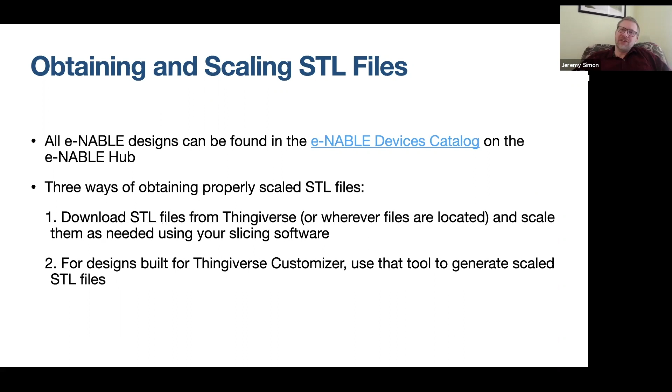So sometimes, unfortunately, the Thingiverse customizer isn't working - it happens to be down a lot. If you click that button in Thingiverse that says 'open in customizer' and it doesn't work, what you can do is download that SCAD file. You have to download a copy, it's free, of OpenSCAD. There is a video tutorial for how to do this, and I have the link here, which will be shared with this recording. So you can download OpenSCAD, load in that SCAD file, put in your parameters and measurements, and it will generate the STL files for you in the scale that you need. Then all you have to do is bring them into your slicer and print - you don't have to scale at that point.

So those are the three different methods of getting your STL files for printing. You can just download them straight from Thingiverse and scale them in your slicer. You can use the Thingiverse customizer to generate scaled STL files by putting in your measurements, or you can download and use OpenSCAD to do the same thing. Now, once you have your STL files, like I said, the most common method is you're just going to download them from Thingiverse and scale them in your slicer. So let me show you what that looks like real quick.

If we go over to Cura, I'm using Ultimaker Cura. This is, as far as I'm aware, the world's most popular slicing software, but there are many others. So today, this is what I'll be showing you.

If you're using a different slicing platform, there's a very good chance that whatever I'm showing you, there's some equivalent in that slicing program because they're all very similar. So hopefully you'll have the same tools available to you. I just happen to be using Cura.

So if we just bring in a file here, I'll just grab an STL file, and this happens to be one of the old Gauntlet options, or what we used to call Gauntlet. We're calling it a cuff these days, for the Cyborg Beast design. And if you need to scale this part, all you have to do is select the part, and then over here on the left side, you have tools, and this one right here is the scaling tool.

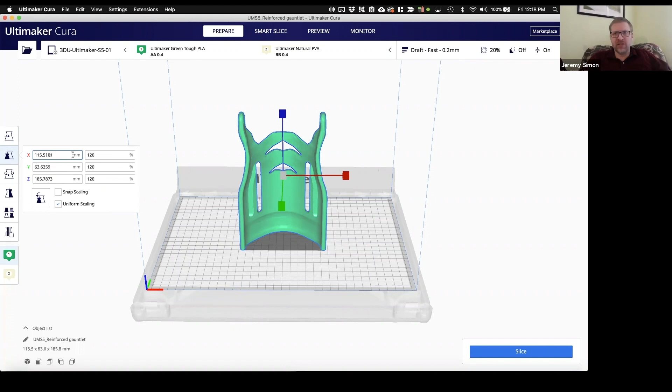And by default, this box would be checked. It says uniform scaling. Most of the time, that's what we do. We just want to scale the whole thing to, let's say, 120%. So if I put in 120%, boom, the whole thing is scaled to 120%. It's that easy. Every once in a while, you'll have to do non-uniform scaling.

Maybe you need to have a device that's extra long. So the Z factor might be a different percentage than everything else, and you could sort of stretch it out that way. So you can do non-uniform scaling just as easily. If you figured out what the right scaling measurements are, that's a different tutorial. I actually just created a new one the other day, so you'll have that soon in the hub.

But the scaling process is as easy as that. You bring in your model and you select your scaling tool and you put in a percentage, which you've already figured out through our virtual fitting process covered elsewhere. And the scaling is done for you. So it's that easy. Let me switch back to the presentation.

All right, so let's talk a little bit about hardware. Now, first, somebody asked me actually just earlier today about the differences between the different types of 3D printers. So we better cover this real quick first, because everything we're going to be talking about today is really related to what we call FDM 3D printing, which stands for fused deposition modeling. It's essentially extruding melted thermoplastics in layers, building up from a build plate layer by layer.

And this is the one that most of you are familiar with. These printers are very affordable. It's very accessible. There are all kinds of different printers available in different price points, and it offers the widest choice of materials. And we're going to be talking about that more later today.

There's another one called SLS. This stands for selective laser sintering. And this is where you use a laser to sinter layer by layer a powdered media. Usually it's nylon, but it could be other materials. So it's a fine powder, and you basically have this sort of a tank full of this powdered media, and you're using the laser to sinter one layer, and then it sort of brushes a new layer of this powdered media over, and it sinters the next layer, and it goes layer by layer.

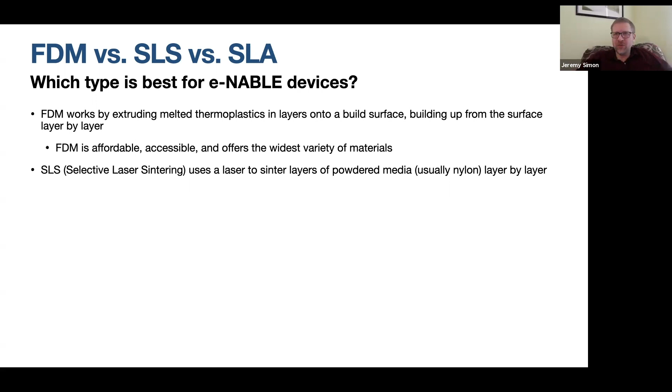But the result is that as your object is being built in this powdered media, it's being fully supported in that powdered media. So you don't need what you would normally consider supports. Your object is fully supported as it's printed. So you can print all kinds of amazing things. But SLS prints tend to have a very rough surface.

And I'll show you this. I've got some photos I'll share with you in a moment that show you these different types of printing and what they look like. But SLS prints tend to have a very rough surface finish, not very good for moving parts when you have to have things that move smoothly with one another like we do. Also, SLS printers tend to be very expensive. As far as I'm aware, the least expensive one is somewhere north of $10,000 as far as what I've seen.

So they're pretty pricey. Then we have SLA, that stands for stereolithography, which uses a light source, could be LCD, it could be DLP, et cetera. Some use lasers to harden a photosensitive liquid resin layer by layer. So in this case, you have sort of a pool of resin, and your print sort of lifts out of it as it cures layer by layer. And I'll show you that in the photos.

But these printers are becoming a lot more affordable and a lot more accessible. So a lot of people are asking about this. Now, the first thing to know about SLA prints is that they're extraordinarily high quality, and I'll show you that in a moment, but they have relatively few materials available.

You only have certain resins to choose from, and most of those resins tend to be, number one, not really well suited for Enable devices. They tend to be sort of brittle. Now, there are tough resins. There are resins that have the kind of physical properties we want, but then you run into the problem of them becoming rather expensive. Some third-party resins are coming into the market, so this might change. We might have affordable options for SLA with resins that would work well for Enable. Right now, it's not something I'd really recommend for Enable devices unless you can afford those really high-end engineering resins.

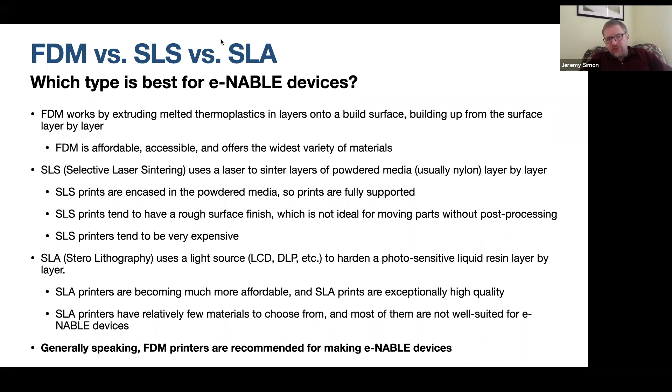Generally speaking, FDM is what we recommend. FDM is what most of you are using. And so with that, we are going to move on and focus on FDM printing. But before I do that, I'll just show you a few of these photos, like I said. So I've got a couple of examples here. If we look at kind of just general 3D printing, this is the one all of you know. An FDM printer is doing just what you see here. It's putting down melted plastic layer by layer, building up from the build plate, building up vertically. Most of you already know this.

So the SLS, now let's see, I think I had one of these. No, I might not have put this into my right album here. So I don't have an SLS print to show you right now, but SLA prints, this is what it looks like when it's printing. It's coming up out of this vat of liquid, and you can see this sort of scaffolding of support that you may or may not need, very much like when you're FDM printing. And those just break off very easily. They're connected just with a tiny point on the object.

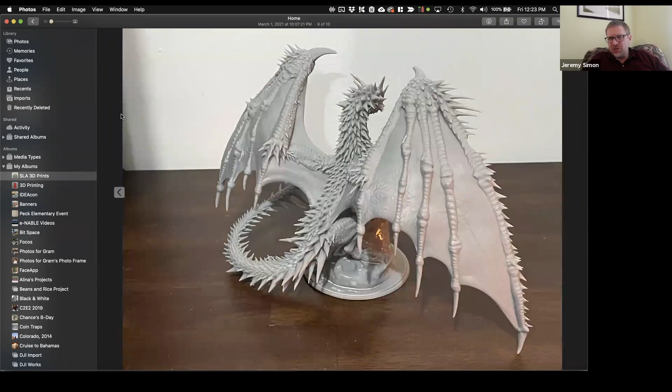And after you break those supports off, you're left with an object of incredibly high quality, which, if we zoom in here, you could not get out of an FDM printer. So when you need the ultimate level of quality and detail, that's where SLA shines. I would not say that it's the first choice for e-NABLE devices though.

So determining which materials you can use. You have your printer now. Let's assume you have an FDM printer. Now you're wondering, what materials should I make my e-NABLE devices out of? Well, the first question is, do you have a heated bed? Because if you don't have a heated bed on your printer, then you don't have a whole lot of choice. You're pretty much limited to PLA, some of the enhanced forms of PLA, maybe TPU for flexible printing if you have a certain type of extruder, but you're pretty limited. Mostly those printers are designed for PLA. And as we're going to discuss shortly, PLA is not really the ideal material for e-NABLE devices. I'll explain why. So let's hope you have a heated bed.

If you haven't bought your printer yet, I highly recommend one that has a heated bed. I also recommend that you avoid the mini type 3D printers. Some people like to start off with an entry level sort of mini printer, real nice small form factor that can sit on a desk. The problem is that the bed is so small that you're gonna have a hard time making some of the Enable devices. Best case, you're gonna have to do a whole lot of print jobs just to get one device made because you're gonna have to print the parts one or two at a time. Worst case is some individual parts might not even fit for some of our designs, and you might have to figure out how to split those parts into multiple pieces, and it just makes things a lot more difficult.

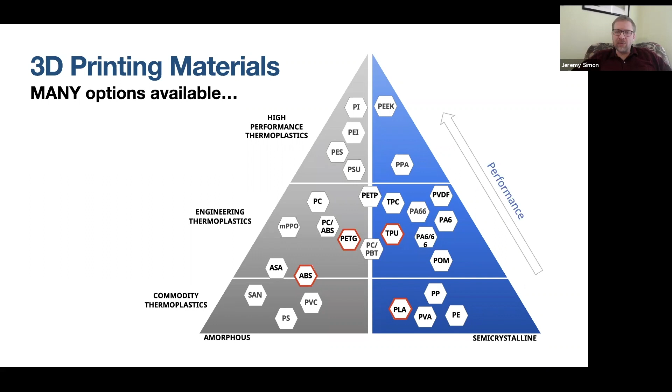I think I have a slide on it, but mostly we're going to focus on these materials because this is what most people deal with in Enable. So let's start with PLA. Most of you already have heard of PLA, maybe have used it. It is wildly popular in 3D printing, and there's good reasons for that. It's very easy to print.

It does not tend to warp, no matter your environment. You can have an open build chamber. You can have all kinds of drafts going on. It's just happy to print just as nicely as if you have a warmer environment without any drafts. So it's really a nice material to work with. It's widely available, probably for that reason. It's very inexpensive, again, because so many sources are available for it.

It's environmentally friendly. It's made almost entirely from plant-based materials and therefore non-toxic. You do not need a heated bed. So pretty much any 3D printer on the planet can print PLA. So it's really a wonderful material for a lot of reasons. The cons would be, though, that it is a fairly brittle material. So it's hard, it's nice, it does have strength, but it's brittle. It will break under stress. It doesn't have a lot of give to it.

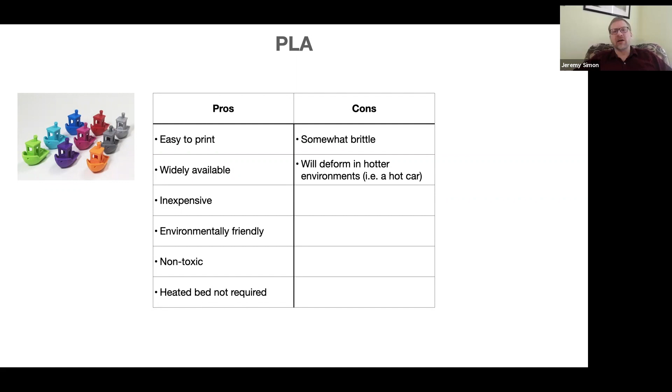And it is going to deform in hotter temperatures. It does not have a very high temperature resistance. So for example, if you were to leave an Enable hand in a hot car on a summer day, you will come back to find that hand in a very different shape than when you left it there. It will be somewhat melted. So PLA, for that reason, is not a great choice. Even though it is so popular, it is not the material we're recommending these days for Enable devices, unless you know that it's not going to be in that kind of a warmer environment.

There are a lot of enhanced PLAs now. There's Tough PLA and PLA Plus and PLA High Impact and all kinds of different enhanced PLAs, and those are really nice. They're just as easy to print as normal PLA. They're widely available also. They're growing in popularity. They're also inexpensive, often the same price as normal PLA, but environmentally friendly, non-toxic, pretty much the same benefits. The only difference is that they're 2 to 3 times as strong.

So you kind of got to ask yourself, well, why would I use normal PLA? Honestly, speaking for myself personally, I don't. I almost never use PLA these days because Tough PLA is my go-to material. There's just no reason to go to PLA except that it's available in more colors. People tend to offer these enhanced PLAs in a smaller range of colors. So that's the only reason I would go to PLA, is if I need something in a particular color. Otherwise, I use Tough PLA.

I'm not talking for Enable devices now. I'm talking just for my general printing needs. I still wouldn't recommend these for Enable devices necessarily because of the temperature issue. Tough PLA and these other enhanced PLAs are generally no better than standard PLA when it comes to temperature resistance. So still not an ideal choice.

ABS. Now this was really popular back when desktop 3D printing got started. A lot of printers were kind of optimized for this. FlashForge printers, for example, when you buy one, it would come with Kapton tape on the build plate, which is designed for ABS to stick well to it. And there are some nice things about this material. If you've ever played with Legos, that's the material we're talking about. It's a petroleum-based plastic that has that typical plastic feel to it.

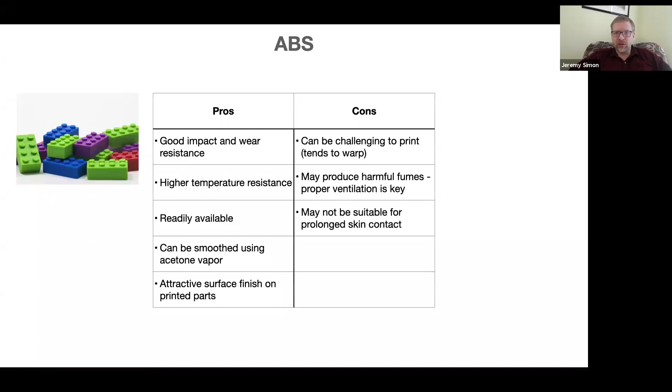TPU. Now here's an interesting material. This is a flexible material, and it's a lot of fun. It has really good impact and wear resistance, so it's great for things that might be involved in a lot of movement or friction or vibration dampening. Some of our e-NABLE designs have incorporated this in the hinges, and it makes for much quieter hinges than some of our other designs.

But it can be a very challenging material to work with, and that goes back to what we were talking about regarding a direct drive extruder, which can be very helpful for printing these flexible materials. Not necessarily required, but very helpful. So something to think about as you're looking at a 3D printer, or maybe your next 3D printer.

And then there's PETG, and ultimately this is the recommended material for e-NABLE devices as of now, at least in my mind. Some might disagree, but this is the material that I have been recommending and a number of others have been recommending because it has a lot of good qualities. It's a lot stronger than PLA, much stronger. It's also environmentally friendly, more so than ABS. It's non-toxic. It's used, for example, in a lot of water bottles and those kinds of products that we're familiar with. It has a much higher temperature resistance than PLA, so it takes care of that issue for us.

But it's not so high that you'd have trouble thermoforming it. It would be very difficult to thermoform an ABS part. It definitely is possible to thermoform a PETG part. You have to use a little bit more heat, a little more time than a PLA part. So if you were using, for example, the hot water method, which is covered elsewhere, you might have to submerge a PLA part for 5 seconds and it starts to deform. A PETG part might take 30 seconds, but it still works quite nicely because you get the benefits of the strength and that temperature resistance later on.

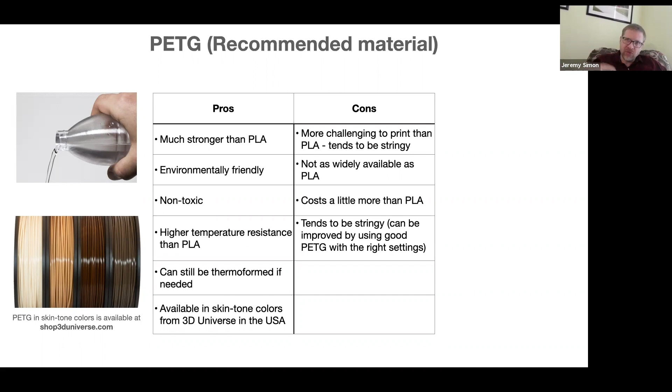So that's the recommended material overall for a device that's going to a recipient. Not necessarily if you're doing your first test device or something like that, but if this is something that you hope somebody is going to end up using, PETG is recommended.

All right, now we've got our 3D printer, we've picked our material, we've got our STL files, and we've gone through our scaling process, and we've figured out how we need to scale them. Now we need to get ready to print them. And the first thing you want to think about in printing is part orientation. Most of us think about part orientation as primarily affecting print time, like how can I get this printed most quickly, or how can I use the least amount of space on my build plate.

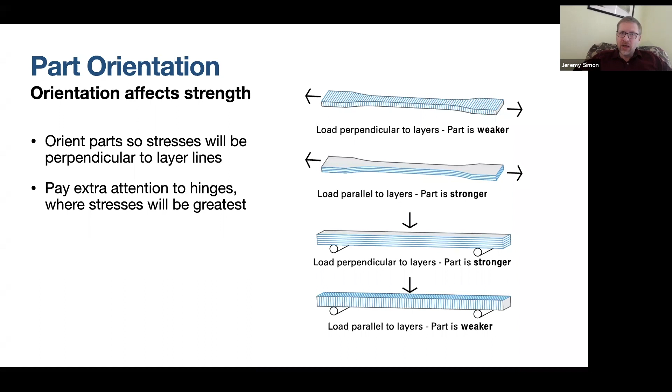But that's not really what you want to be thinking about. What you want to be thinking about is the orientation of the layer lines and how that relates to the stresses that are going to be placed on that part and what's going to yield the best strength overall. So this is worth taking a look at. Let's pause for a demo here.

If I go back into Cura and we reset our scaling here, and we look at this. So I just grabbed this. This is an old version of a cuff that is probably not used very much anymore. It goes with the Cyborg Beast design, but it's helpful to illustrate a concept. I don't know if you noticed, when I first dragged this file in, it came in this orientation, which suggests that that's the way the designer wanted you to print it, right? So you'd think, okay, they want me to print this vertically.

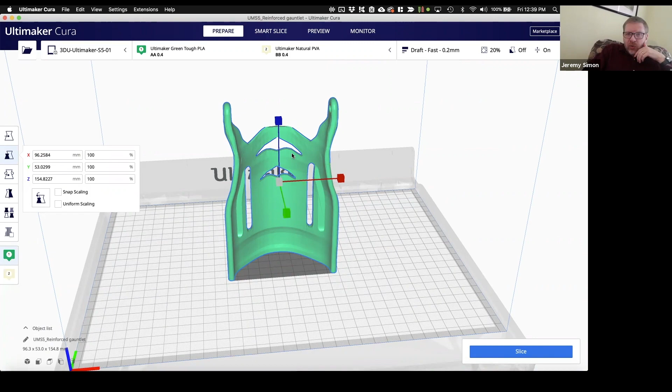And at first glance, that looks nice. It looks like a good way to print it because it looks like you have a flat bottom here to connect with the bed, which is something that we know we want when we're 3D printing for good bed adhesion. And even when you look at some of the spaces in here, how these are angled upwards, that suggests it's meant to be printed this way because you can print as you're stepping up layer by layer. Printers can do that without supports. So that all suggests that it would be done this way.

Well, let's do an experiment here. I'm going to go ahead and slice this just using draft settings, so it'll be quick. Slicing is basically taking your model with your designated settings and dividing it into layers and instructions for the printer on how to print each layer and where to move on each layer. So it's slicing that right now. And as soon as the slicing is done, we get a chance to preview it, and that's what I want to show you here.

So let's just take one more moment. There we go. All right, so now we'll go into preview mode, and it's got to render real quick. Okay, so here we go. Now we've got our model, and at first glance things are looking okay. But here's what I want to show you. Let me reposition this a little bit.

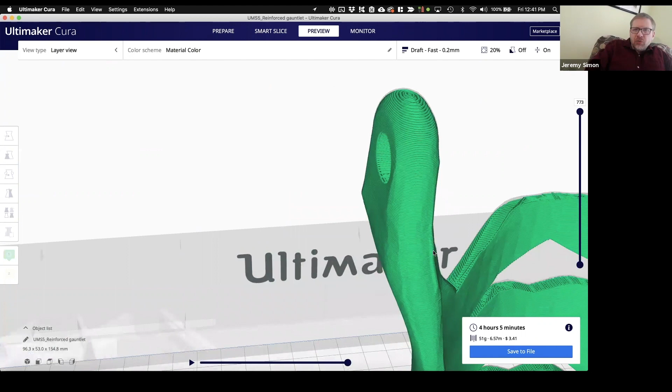So let's look at these hinges here. When you really start to zoom in, you can see the individual layers, and over here you've got a tool on the right to scroll through these layers, and you can see what's going to be printed on each one, including your outlines and your infill and everything. And if we get up here into this hinge, look what's happening.

If you look right there, that's where this device is going to break, because you've got so much stress on this hinge and you've only got these two little spots of material trying to connect layer to layer. Your parts are always going to tend to break along the direction of the layers. The layers are just going to tend to split along the line that they were printed. They're not going to tend to break perpendicular to those layers. So even though it would look like you would want to print this part vertically, that's not true.

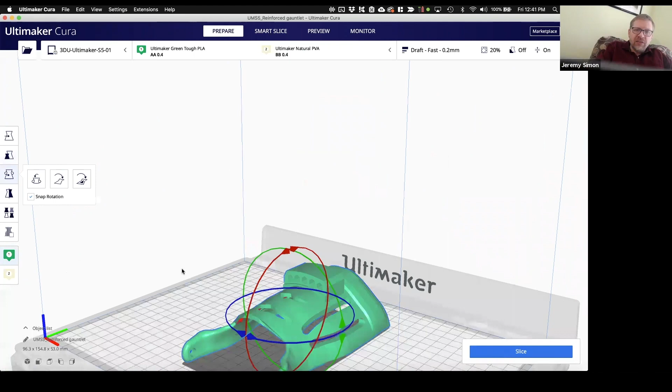Let's go back to our prepare mode. What we would want to do is go to our rotate tool over here and flip this part. You can use these little arrows here to flip it 90 degrees. There we go. And we would want to print it in this orientation, okay? Now, that opens up some other issues that we're going to cover later. So for right now, all I wanted to show you is the orientation thing, and we'll come back to this a little later.

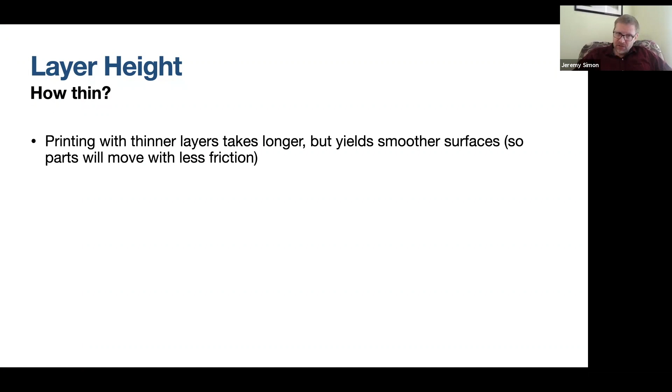Printing with thinner layers takes longer, but it yields smoother surfaces. So when you have moving parts, you'll have less friction, which is good for enabled devices. For the most part, we recommend somewhere between 0.1 and 0.2 millimeter layer heights for enabled devices. It's not set in stone, but that's what we generally recommend.

I usually use 0.15 millimeters myself. Sometimes I'll use 0.1. I usually don't go to 0.2, but a lot of people do, and it's okay. Thinner layers are nice because it makes parts move more smoothly and more quietly. I personally don't care about print time so much. I'll set up the print job and let it run overnight, so I'm happy to let it go at a slower pace and get a nicer print quality out of it.

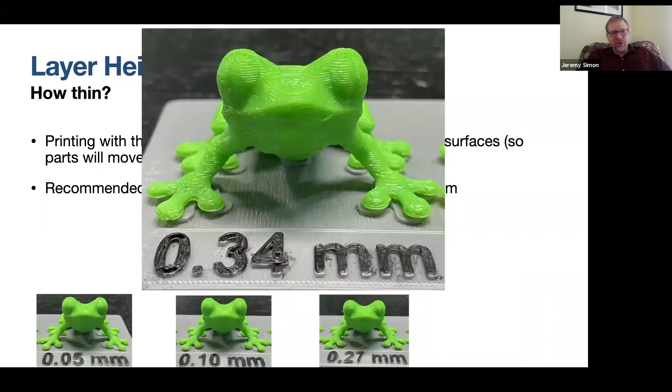I'm going to move on. Shells and wall thickness: you want at least 3 shells. I usually say 3 or 4 shells for enabled devices.

Or sometimes it just asks for your wall thickness, and that's going to depend on your nozzle diameter. So if you're using a 0.4 millimeter nozzle, which is typical, and that's what the 3 or 4 shell recommendation is based upon, that means we're looking for a 1.2 to 1.6 millimeter wall thickness, generally speaking.

Too much more than that, and your device is going to be heavier than it needs to be without enough added strength benefits. It tends to break at the joints or things like that anyway, so you're not really getting a lot of benefit, you're just adding weight. So you don't want to go too much higher or too much lower than 30, or you start to get a weaker part overall that might have breakage.

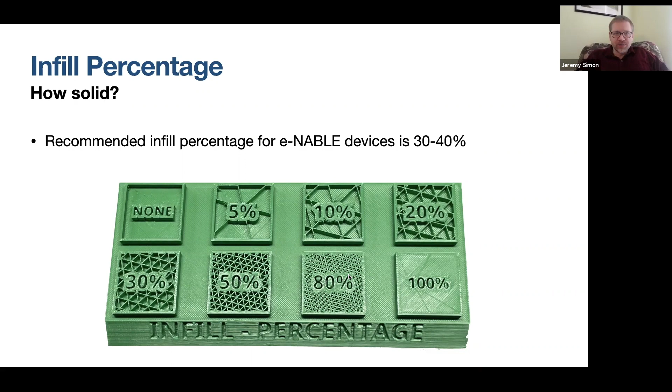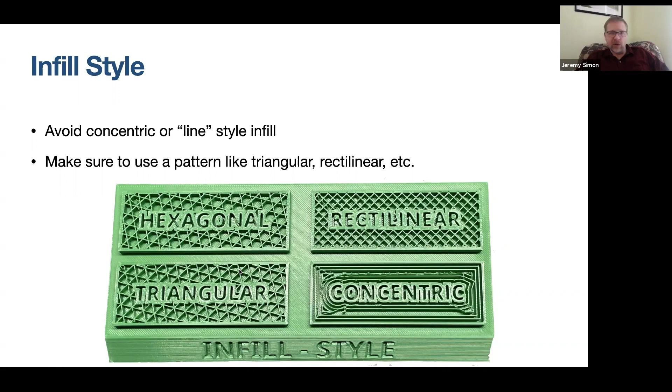Infill style is also an option. A lot of slicers just take care of this for you. The default is usually something like rectilinear or triangular, and anything like that is fine. Hexagonal is fine too. Any of these patterns where you see that crossing grid pattern is fine—you get a nice strong infill. You want to avoid things like concentric, which you see in the lower right. It just doesn't give you the same kind of strength and rigid structure on the inside.

Several of our e-NABLE designs, and I dare say most of them nowadays, are designed and optimized to print without supports, which is really nice. Most printers can handle overhangs up to 60 degrees or so without supports. I know that might be a new term—we're going to talk about overhangs in a moment. Bridging can also be used to help with this, and that might be another new term for you. So we're going to cover those two new terms next and how they relate to supports.

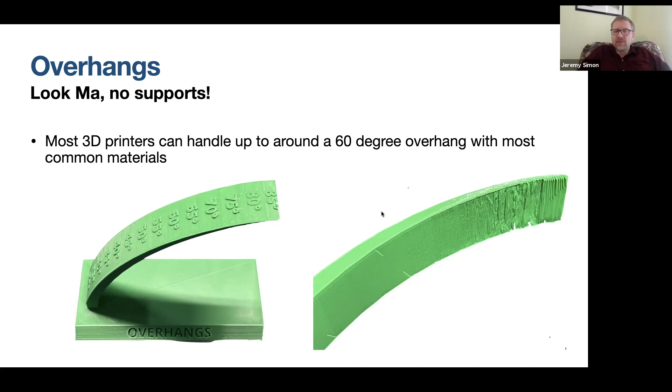All right, so then there's also something called build plate adhesion, and this is in most slicers. You can choose your build plate adhesion method. There's generally three types of build plate adhesion, or I guess you could say a fourth type is none. A raft is one option. It's one that I almost never use, and I would say avoid it if you can, just because it adds a lot of printing time.

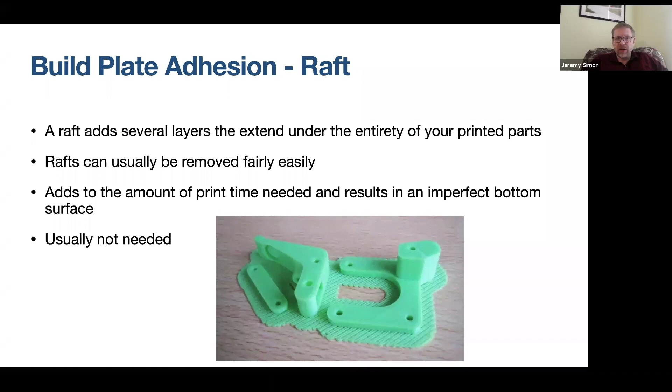You have to kind of go around with an X-Acto knife and trim the little bits that might not come off cleanly. So again, if I can avoid it, I don't use it.

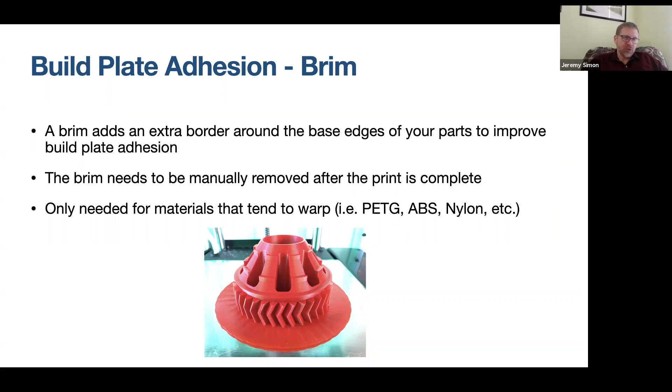It does help with materials that tend to warp, like PETG, ABS, nylon, etc. Again, with the right adhesive though, even with those more difficult materials, I usually don't use a brim, and I'll show you that shortly. And then you have what's called a skirt.

This is what I typically use. This is really simply there to clear out the extruder, make sure that if there were any remains of a previous material in there, or if maybe your material wasn't fully primed all the way up to the nozzle, if it settled back a little bit, the skirt just extrudes a couple of loops of material outside of your object so that you know your material is coming out clean and smooth, and then it proceeds to start printing your object.

So I really like using a skirt for that reason. It's not connected to the object, so you take your object off the build plate and the skirt comes right off, you just throw it away. It doesn't add any time, it hardly adds any material. So I usually have the skirt enabled as an option.

All right, so general recommended settings, we've covered this, but just in summary: layer height 0.1 to 0.2 millimeters for e-NABLE devices, shells or outer walls 3 or 4, or if you're doing something other than a 0.4 millimeter nozzle, you want somewhere around a 1.2 to 1.6 millimeter wall thickness.

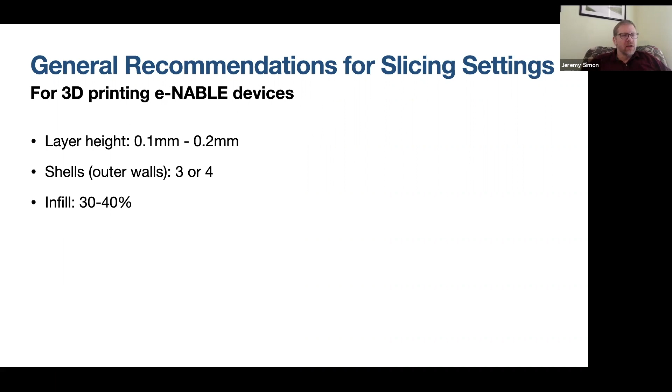You want about 30 to 40% infill. You want to address all the temperatures and speeds and retraction settings, etc., based on the material that you're using. We'll talk about some of that in a little while, but that should be provided with the material that you get. The material manufacturer will give you the settings or a profile that you can use, so you shouldn't have to mess around with that too much.

And then one last thing, and this is incredibly important: always, always, always preview your G-code before you print. I cannot stress this enough. Nothing will save you more headaches and more wasted time and wasted material and failed prints and frustration than previewing your G-code before you print. So absolutely get in this habit. And I'll show you why.

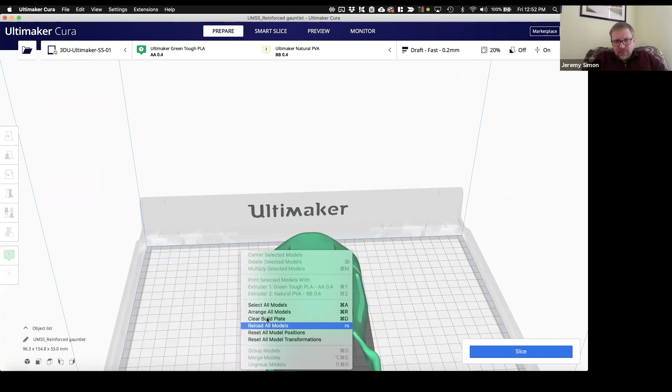Okay, let's get into another little demo here. I'm going to get rid of this part for a moment, and let me grab a different part. This is one that I've been working with Jon Schull on in a different group, where we've been doing some design work on masks. This one is for a vacuum formable mask that we're working on, and this is a mold that we're printing. So he sent this model to me.

You drop it on the build plate and it looks good. So I would go ahead and set up my settings and get the layer stuff that we just went through - let's just pretend I already did that. I'm going to go ahead and slice this. We've got it on draft settings here for this demo, so it should go fairly quickly.

But again, I want to show you why it's so important to preview, because it can be very deceiving. Even if you kind of pan around, everything here is looking pretty good. I mean, we've got a nice flat surface. Yeah, I mean, everything looks like this should be no problem.

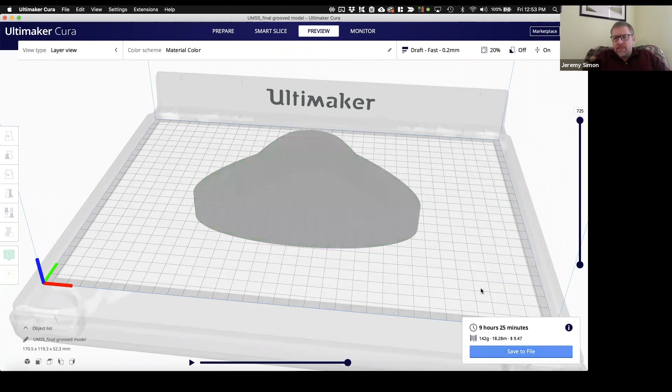Now the slicing is done. Let's take a look at the preview. And again, once the preview renders here, the very first thing you want to do is scroll all the way down to the first layer. This is the reason we're using the preview. And if I go down to layer 1, look at what becomes immediately apparent.

Oh, that first layer doesn't make full contact with the bed. So that bottom surface wasn't actually flat, even though it looked like it. It maybe had a little bit of a bulge to it that I couldn't see.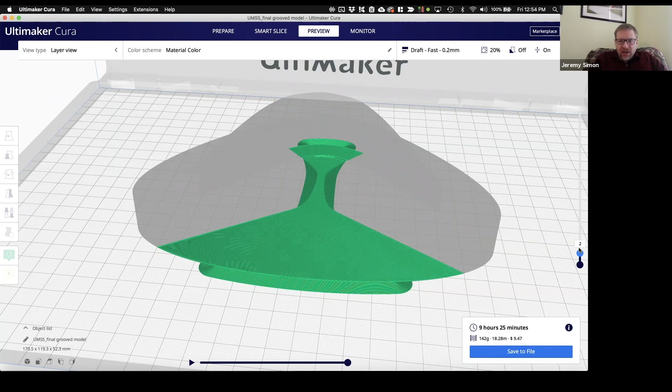And if I was to try to print this, it would print that layer, and then it would go up to layer 2, there you go. So you see it's trying to print outwards further, and then layer 3, it goes a lot further, and only when it gets to layer 4 is it printing the full surface. Well, I'm using 0.2 millimeter layer heights here, so that means that I'm already at 0.8 millimeters off the bed, and it's trying to print. That stuff is not going to stick, and so this is going to be a failed print. And I can see that just by looking at the first layer.

How do I fix this? Well, it's easy. I could go back to the CAD tool and fix my model. That would be the ideal way, but there's a quick fix. Just go here to your Move tool, and on the Z-axis, vertically, I'm just going to drop it down. I'll take it down 1 millimeter. What that's going to do is move it just slightly below the build plate, essentially cutting off the bottom part of your object, and you will end up with a perfectly flat surface. And so after you slice it and go into the preview and go down to layer 1 again, you'll see it's going to show the full layer 1.

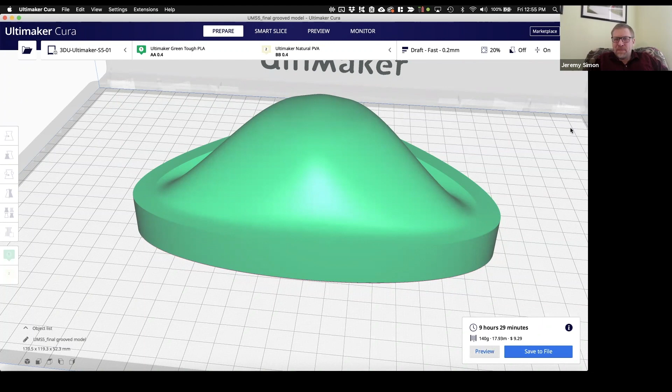So here we go. Now if I scroll down, it's still rendering, there we go. Scroll down to layer 1 and look at that. We got a beautiful layer 1 covering the entire object. That open slot in the middle is intentional, that's part of the object. And you can see our brim around the outside. This is going to be a successful print. And I can then scroll up and look at everything else. My infill looks like it's enough, and I can look at the thickness, and everything looks like it's going to print well. Now I'm ready to print, okay?

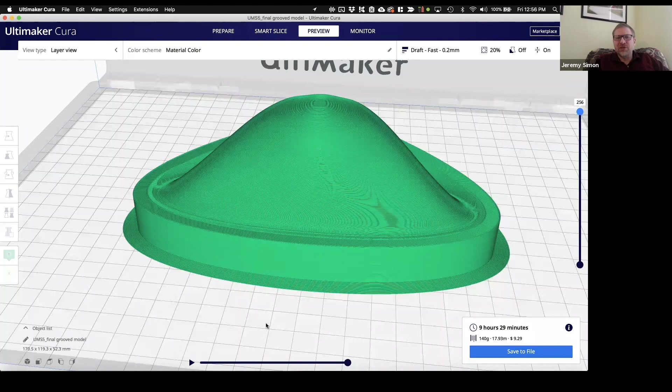So it's very, very important to preview your G-code to avoid lots of failed prints and headaches, especially when you get into some of our earlier designs where maybe folks hadn't gotten so used to how you prepare parts for 3D printing and make sure they're oriented properly and have a flat bottom and all that. Some of those earlier designs have parts that you really just can't print without manipulating and adjusting them a little bit.

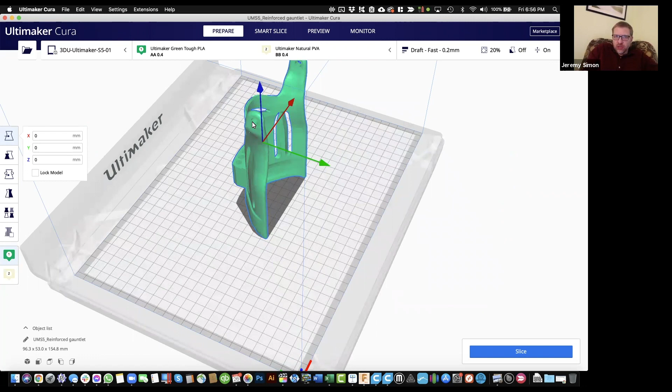All right, so now let's take another look at this cuff object that we were looking at before from a couple of different aspects. We already looked at why this is not a good orientation to print in, because we would have some strength issues because of the layer orientation, especially near the hinges. So let's go ahead and reorient. We'll just spin it around here. Let's rotate it like this, and then rotate it like this. Okay, and now it looks like that would be a flat surface. The first thing we're going to do is check to see if that's the case.

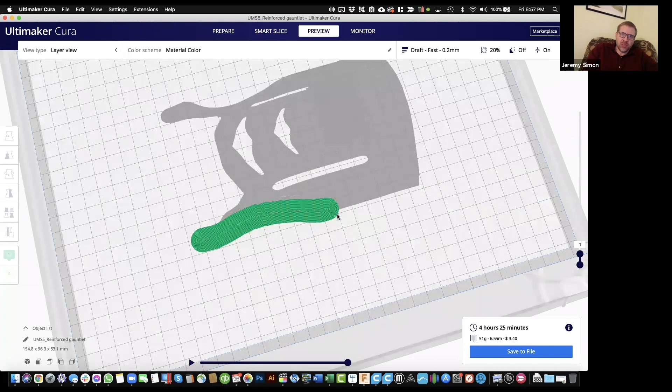We're going to go ahead and do a slice, and then go to preview. And we'll scroll down to our first layer, and we can immediately see that we are not making good contact with the bed. We're only making contact along this portion here. So that's something that we have to fix. So let's go back to prepare mode.

Now, if you select your model and use the rotation tool, they have a couple of tools here in Cura. You can reset the rotation, that'll set it back to what it was. But they also have a lay flat tool. So if I click that, let's see what it does. Doesn't look like it did a whole lot, but let's go ahead and slice and see if that improved the situation. Preview.

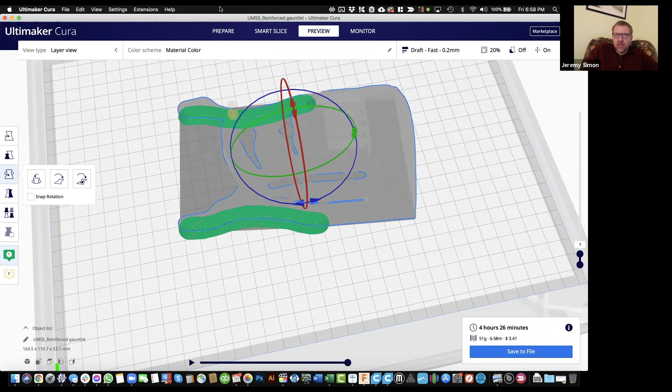Okay, well, it did improve it. It rotated it a bit so that this side is now making contact as well, but it's not making contact all the way to the rear part of the object. It's only the front. So let's see what else we can do. If we kind of just spin around and take a look at this, you start to see that what you're really dealing with is just a modeling issue. This just wasn't really designed with a flat surface to be printed in this orientation.

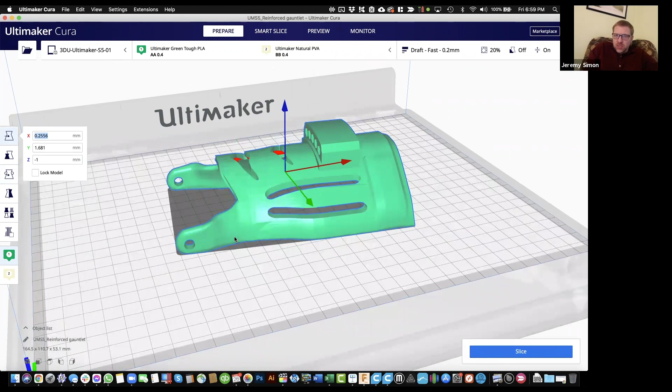And one way that we can fix that is just to select our object, use the Move tool over here, and move it negative on the Z-axis, let's say 1 millimeter. See what that looks like. Oops. And it just drops it down a little bit. So it is going to cut off, and that might be too much. Let's try negative 0.5.

And so what it's going to do is it's just going to ignore anything that's below the bed level, which is essentially just slicing off that part of the object. And it'll start printing where the bed starts. So if we slice that now, and go back down to layer 1, now we're talking. Now you can see that it's making contact all the way along both sides. And as you scroll up, it's building cleanly up from those spots.

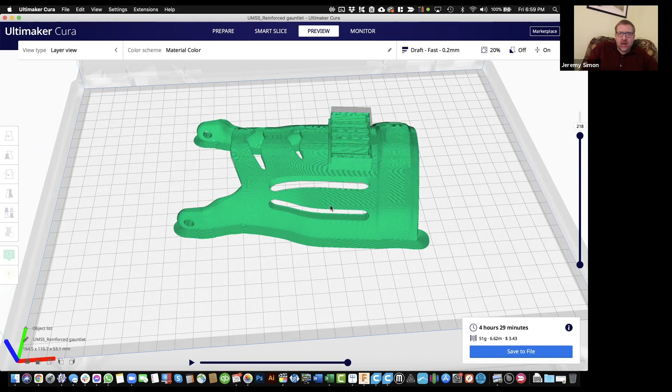Now, we still have to think about supports. Okay, well, you could get away with doing this without supports. The main issue is going to be these slots actually in here. And the reason for that, if you zoom in, you can see this with the layer preview. Now we can do bridging, so you might think, well, why can't bridging handle that? But if you scroll down to that point, let me get above it, as it starts to build out across that, see, it's not going all the way across.

And the reason for that is that the 2 points on each side are not at the exact same height. That upper surface has actually got a little bit of a curve to it. And so it has to sort of build its way across. And those parts right there are just not going to work. They're going to just fall down because you're printing in midair. So that's where you're going to have some messiness.

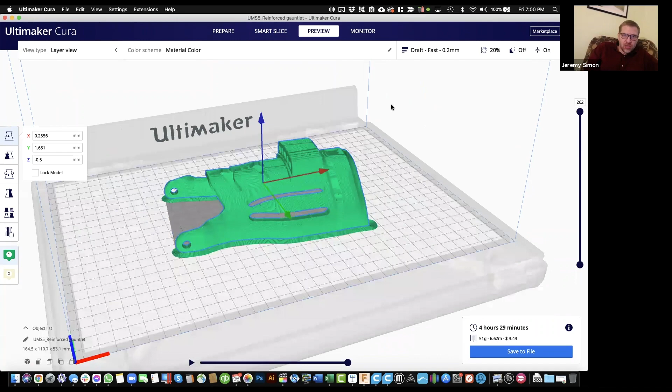And for that reason, if nothing else, even though you could print the rest of this, as far as this part on the inside, that could be done without supports because it's building up to that. And if you look up on the top portion, these areas where the tensioner pins go, those can also be printed without supports, because if you look at the shape real closely, you're stair stepping, you're building up gradually, and the printer can handle that. So there's no problem there.

But let's say that we did want to print this with supports to deal with that slot issue. So we'll go back to our prepare mode. And let's go into our slicing settings, and we'll just turn on supports. We'll just go with the default settings and see what happens. All right, so let's just say we're going to use our build material for the supports, nothing fancy. This is what you would do if you have a single extruder printer, which is common for most folks. You do not need dual extrusion for what we're doing here. Go ahead and slice this. And now let's preview.

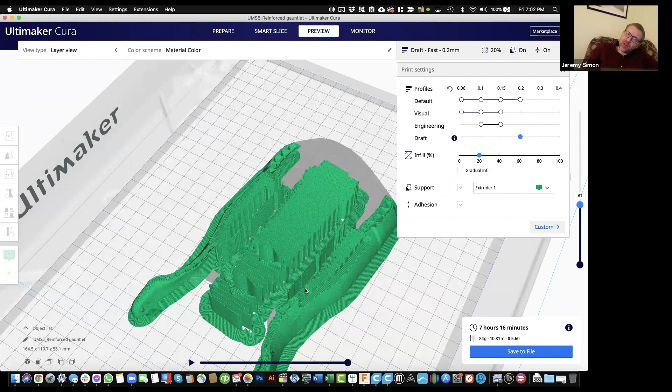All right, so now we can see that we have that support scaffolding going throughout the center area. And it's a little harder to see, but over here on the side, you can see that it also is building supports up to the part we were looking at. So that'll support the upper portion of that slot so that that prints cleanly. And if we keep scrolling up, we'll see that these supports go all the way up.

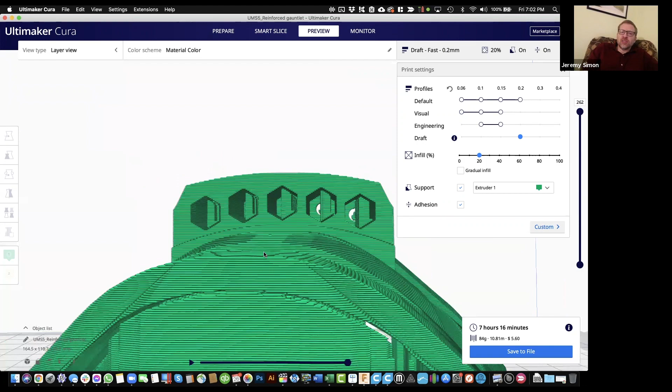Now let's look in here. Look what happened. It's actually putting supports inside these tensioner pinholes. Not the end of the world. We could certainly pull those out with a pair of needle-nose pliers or something, but on some designs, you have things like cable channels where you really don't want supports. Those channels can kind of wind their way through a palm and that sort of thing, and you do not want supports going in there.

So if you run into a scenario where you need to print with supports, but you don't want them going in certain areas like this, Cura offers a nice tool called a support blocker. Now, I don't know that all the slicers will have this particular tool, but in Cura, it's over here at the bottom of the left-hand toolbar. It looks like you see here with a symbol with a box next to it. And if you click that and then click somewhere on your object, it'll just drop a little square like this. Doesn't look like anything much.

Let's now deselect our object just by clicking off into the empty area here. And now we can select that cube object that was just put in here. See, it's just a small cube. That is an object which we can now move and resize and reposition however we need to. And wherever that object covers, it will block supports from being printed. So let's do that real quick.

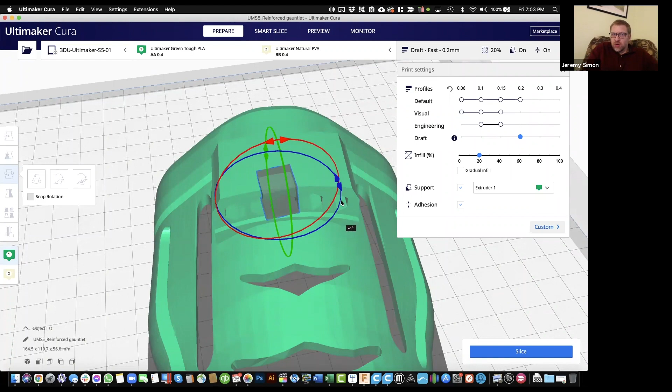We'll stretch it out. We'll move it over here a little bit. We'll rotate it a bit to align it. Whoops, that's the wrong handle. Undo. I see it's the blue one I want. Okay, so rotate it a bit. And now let's stretch it out. Let's do non-uniform scaling so we can stretch it this way and we can stretch it back that way.

And I don't really need it much taller, but we'll do a little bit like that. And now we'll move it because we want to make sure that it's not extending down into this area, because that will block the supports for that region underneath. Anything underneath that is going to get blocked. So we want to move it up until we can't see it underneath there, but so that it's still blocking those holes where we don't want supports. And there we have it.

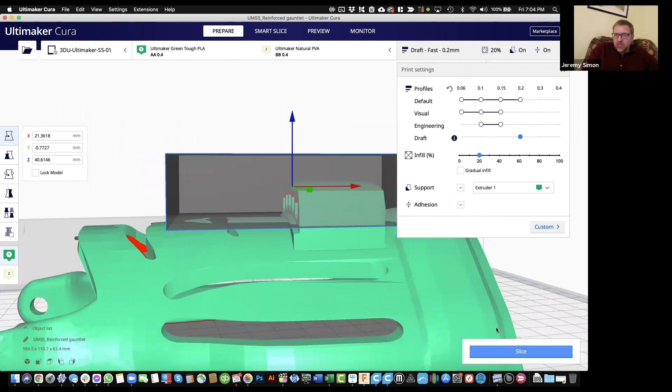So if I go ahead and slice now, let's see what happens. So now if we scroll through the layers, you'll see that we still have our supports there throughout the print. But when we scroll up to the top, no more supports inside these tensioner pinholes, which is exactly what we want. So that support blocker can be a really useful tool.

This is getting a little bit into advanced territory, but I'll also mention that these support blockers, once you add that object in, it can also be used in other ways. You can use that to change settings for specific regions of your print. So you could select that support blocker, and then this other tool, this icon here that has the 4 different types of shapes with different sorts of shading or patterns on them, click that. And now you can choose, with your support blocker object selected and only that object selected, what type of mesh that is.

Now, right now it's selected as don't support overlaps. In other words, support blocker. But you have three other options. Normal model, so you can just say that part's just normal, or you can say print as support, which means that anything overlapping with that will print as supports instead of as the object. So your object becomes sort of an indicator of where to put supports. You can get creative with that.

And here's the one that gets really interesting, modify settings for overlaps. So you can click on that. And now you can say either infill mesh only or cutting mesh. Infill mesh means that whatever settings you choose will only affect the inside of the object. Cutting mesh means it'll affect everything that your tool here, the blocking tool, is passing through, including the walls, the shells, everything that's included within the boundaries of your object. So let's do cutting mesh.

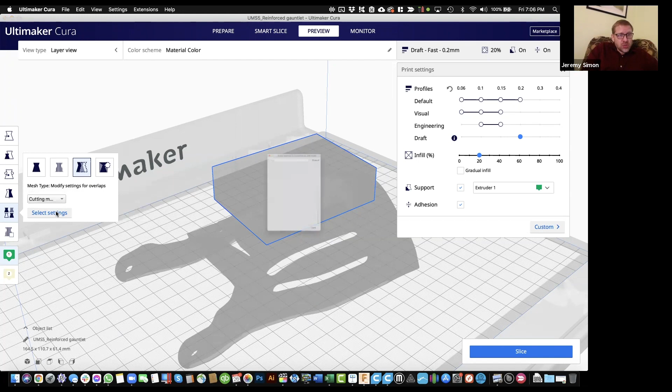And then you can start to choose settings that you want to modify. Now, not all settings are available here, but a lot of settings are. And you can go through and see there's quite a few. This isn't the entire selection that you would have when you're modifying your settings normally, but you can change things like your line width. You can make the walls thicker in a certain place. We'll just throw a few of these in here to play with it.

You might want to change the amount of infill. Let's see where that is. Infill density. You might want to change the infill pattern for a certain part of your print. Let's see, you can change things like your flow rate, your print speed. Maybe you want to go slower for a certain part of your print because you want it to be extra high quality. But let's just start with this.

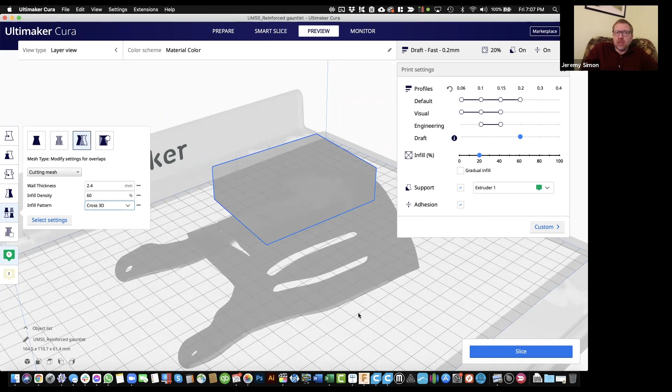So I'll close this. So let's say for this upper portion where we have this tensioner block, for whatever reason, we want this to be super strong. Let's say we want the wall thickness to be, instead of 0.8, 2.4 millimeters, extra thick. And we want our infill to be 60% instead of the rest of the object, which is 20%. And let's change our infill pattern, let's just do something like Cross 3D, which is not a typical one, but just so you can see the difference. Let's go ahead and slice now and see what happens.

Okay, and now when we scroll through the layers, let's see what happens. On the bottom, we've got just what we had before, same kind of infill, same kinds of supports. But then when we get up into this top area, see what starts to happen here. You're seeing a lot more solid material. Let me zoom in for you here. So you can see that our object itself is a lot more solid. Get up in here where you can see it better. That portion up there is all solid because that's our 2.4 millimeters of wall thickness.

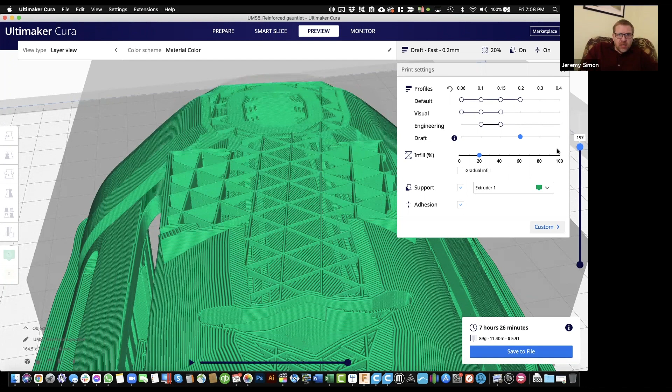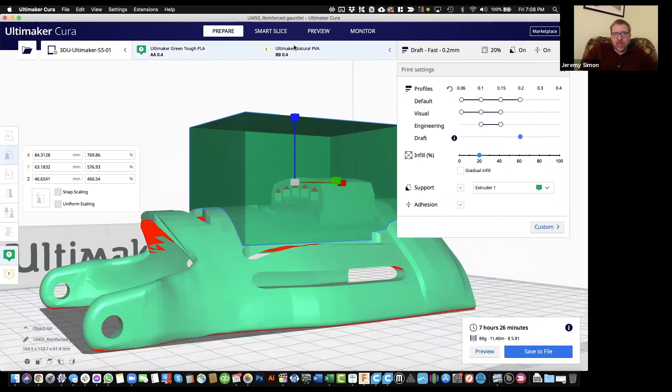We're no longer doing the support blocking function. So as of now, we have supports back in there, but we could throw in another support blocker to take care of that. But you'll see that up here, the infill pattern is, well, you can't see it too well because really all you're seeing here is the 2.4 millimeter thickness on the walls. There's not a lot of infill being used up here. So let's go back and change that real quick. And what we'll do is we'll just resize our support blocker and just make it cover more of our object.

Okay, and now let's see. It's not going to affect much down here. But there you can see, just over here, the new infill pattern that we specified, which is that Cross 3D. Let me get that in clearer focus for you. So you can see in there, it's doing this three-dimensional cross type of infill pattern, and you're seeing much thicker walls. There's that 5 or 6 extrusion line widths for the walls. So you can see that it's applying those different settings only to that region of the object.

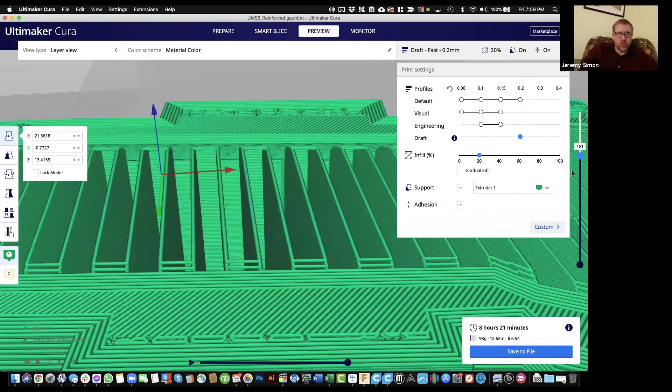If we take a look at another part of the object, like these side portions here, you can see that it's using the previous infill pattern over there on the sides. So you can see how that customization can come in very handy. You can drop these little, go back to the support blocker, you have to select your model, support blocker, I gotta be back in prepare mode. So this can be a really powerful way of customizing your prints if needed.

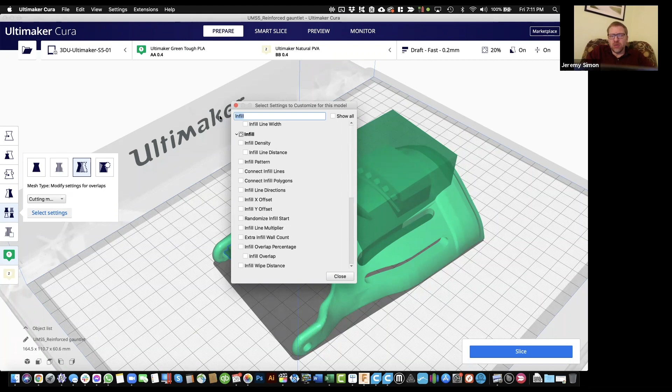Here's another example. Say we want those hinge areas to be extra strong. You can drop another support blocker in there. We would resize that support blocker. I won't take the time to do it now. Go in here, modify settings, same thing, make it a cutting mesh, maybe make the infill 100%, just print it solid. Or maybe even better than infill, maybe just do the wall thickness, because that way it's just going to fill it in solid with the outlines, which is a little bit stronger than using infill.

So let's just go nuts. We'll just say 5 mm, which is obviously just going to fill up the whole width. And as you can see, that one little area there is being printed in solid, and it's doing it concentrically because it's just treating it as walls. There's no infill, so that would be nice and strong. And I would extend that to cover this entire hinge area if you wanted better strength. Back to our slides.

Okay, now we've done our slicing, and we've set our settings according to the material that we're using, and now we are ready to send it to the printer. Make sure that you're using the right adhesive. This is so important because this has changed a lot. If you got into 3D printing early on, it was using Kapton tape, blue painter's tape, special print surfaces, all kinds of craziness. Nowadays, I don't think there's anything better than printing on a plain glass print surface with the right kind of adhesive. And my personal favorite is Magigoo.

Now, there's a lot of options out there, and a lot of them are really good. So this is not the only option, but I've tried a lot of them, and I keep coming back to Magigoo because they have a number of different adhesives designed specifically for different materials, but their original formulation covers all the materials that we recommend for enabled devices. It's for PLA and PETG and ABS and a number of others. So it covers a lot of bases. You spread it onto your glass just like you would a glue stick, it takes just a couple seconds to dry, and then your prints stick much more reliably than a traditional glue stick.

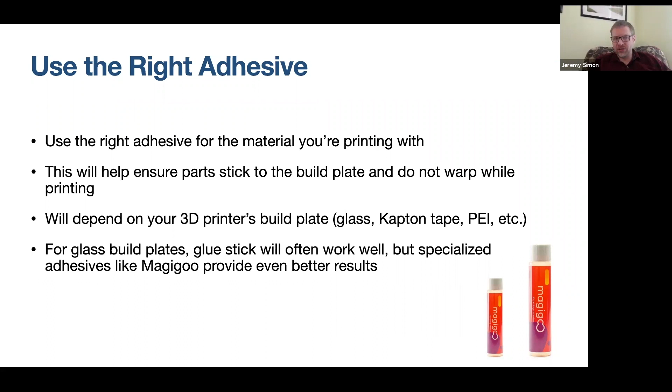You also need to think about your environment. If your environment is too hot or too humid or too drafty, these things can affect your prints. So in some environments, you're going to want to think about having an enclosed build environment. Some 3D printers are fully enclosed, others are not. So that might be part of your thinking as you look at buying a new 3D printer. Having an enclosed 3D printer is a nice thing, especially if you get into these more advanced materials like PETG.

And if you have an environment that tends to be more humid, having dry material is really important. It will affect your printing quality. So have a filament dryer on hand.

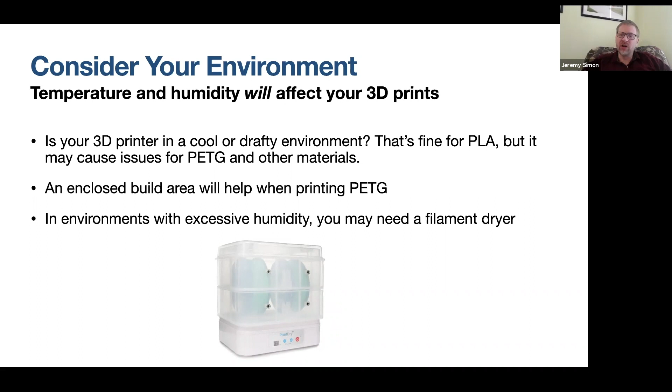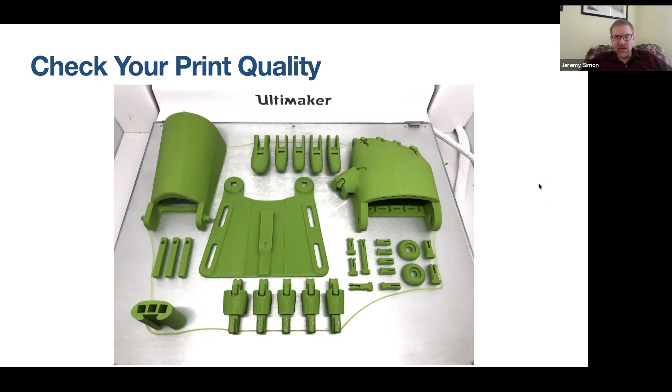So once you get all your parts printed, it's time to assemble. And there you have it.

That is my presentation. So at this point, I have no idea how I did on time here. I'm not good at sticking to, looks like about an hour, so good. So I wanted to leave time for a lot of Q&A and discussion. I'm going to keep the screen sharing on, I think, because I might need to use that, but I'll turn off the spotlight. And Ben, if you want to start off with any questions you have, we can then open it up to everyone else.

I think there were a couple key terms in there. Maybe just to ask the folks that are here, were there any terms that you guys could use some clarification on? I know thermoforming, I did add a link into that. There wasn't so much description about thermoforming, so there's a little bit of info in the chat about that.

On thermoforming, is there a part, I think there's a part, right, in the Phoenix hand that needs thermoforming to shape or something like that?

That's correct, yes. So if we, and I'll pull this up here, when you print this is a Phoenix hand that you're seeing here. That's how the arm guard or the cuff, that's how it prints. It's a flat part, it prints flat. Now, the nice thing about that is, think about how the layers are going to be printed in this part. The layers are all going across flat. It's the whole thing from the bottom up. Everything is going to be printed with the layers horizontal, right?

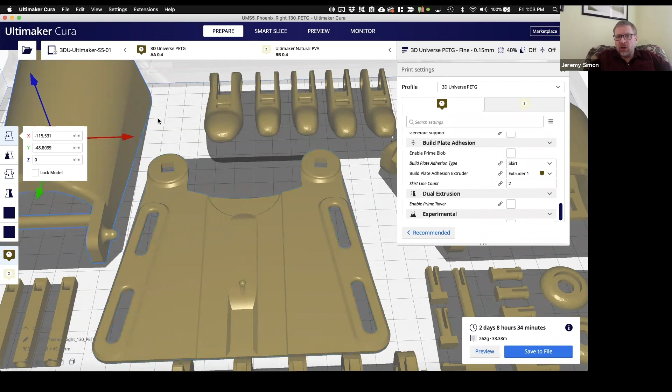Now that part is going to be thermoformed using the jig, which you see over here in the upper left. You'll heat up the flat part and use this to form it on. And think about after that part's formed, your layers, think about the direction of the layers. They're going to follow the contours of the end part because of how it was printed. So you end up with a really strong arm guard that way.

That's the benefit. The downside is you have to do the thermoforming step. So some people don't like that, but there are multiple methods of doing the thermoforming. You can use hot water, dip it in hot water, and then take it out and form it, or you can use a heat gun. And we have multiple video tutorials that show how to do that, including the video tutorial that I did specifically for this hand, for the Phoenix hand, which does show clearly that thermoforming process. So take a look at that if you haven't seen it, and that'll show you the whole thing, including the 3D printing, the thermoforming and the assembly and everything.

Great. So it looks like Vivek had asked about bed leveling. Okay, yeah, if you can talk about that.

Well, bed leveling is critically important, but it's a little hard to talk about because it depends so much on the printer. Some printers are completely manual in terms of bed leveling. Some printers have assisted bed leveling, where they have sensors that'll probe the bed, and then it tells you, please adjust this screw or adjust that screw. And then it'll check itself again and say, okay, everything looks good now. Other printers have fully automated bed leveling that can probe the surface of the bed in a whole bunch of different points and then automatically make adjustments to level the bed, or at least compensate for any minor leveling issues. For example, I happen to like the Ultimaker printers myself, not the most inexpensive of printers, but wonderful quality.

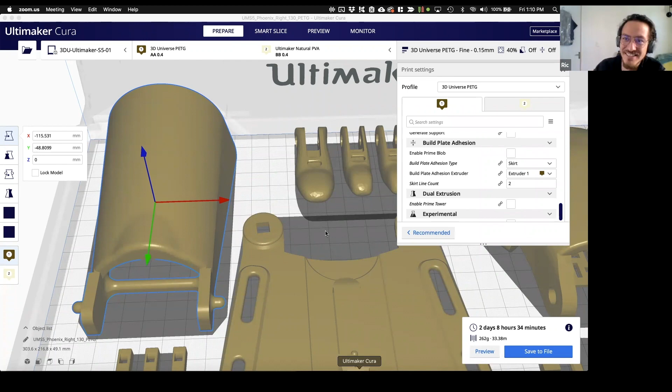When you showed the piece that John sent to you and moved it a little bit in the Z-axis, you said you move it down a little bit, so some part of the model was out of the bed? Let me completely exaggerate it for you - we put it down to -10 millimeters. Now you can see it more clearly. Half of this object is now literally below the bed.

And what the slicing software does is it just ignores all that - it doesn't do anything. It just starts printing at the bed, which is exactly what we want. So the effective result is the same as going to your CAD software, slicing a flat plane and making sure that plane is lying flat on the origin.

I mean, yes, that's ideal - that's what you want to do long term, so that when you share this part with other people, they don't have to do this. But if you just want a quick fix, yeah, you can just drop it down a little bit and cut off the bottom.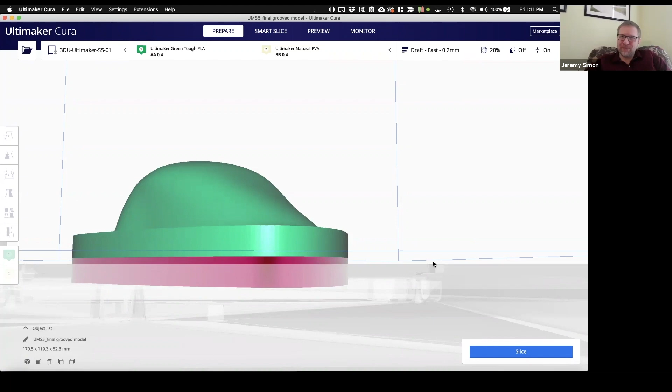Jeremy, I wonder if you could show us a few e-NABLE devices, and then talk about how printing is different with different devices. If you could pop up the catalog for a moment - let me find, I have an album here. I just have to find it, I won't have all of them, because I know some devices are much more complicated to print than others.

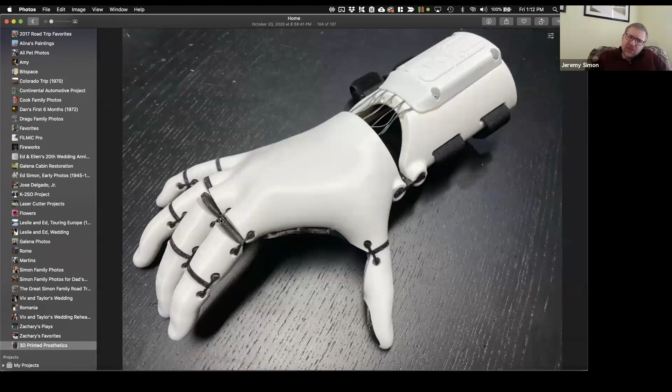So, this is one of our more recent designs. This is the Kinetic Hand, and it's a beautiful design, but all of these hinges in here and the palm mesh, this covering here, are printed in flexible materials, and that can be tricky.

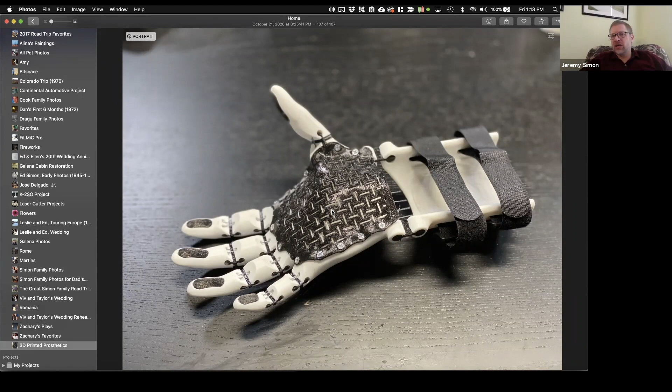Once you get your printer set up right, if you have the right kind of printer that ideally has a direct drive extruder, and you get the right material and settings, it's very doable. Don't let me scare you away from this. We have a lot of people having success with very consistent results, but your first print out of the gate won't be flawless. It'll take some experimenting to get the right settings dialed in. It's just a little trickier than other materials, and some printers aren't set up to handle it well, so it depends on your hardware.

Maybe just to clarify too, the white material is different from the black in between the digits. There's a flexible hinge printed in a different material than the white shell. The rigid parts are printed in a rigid material. In this case, I used tough PLA just for this test, but I would probably use PETG if this was for a real person.

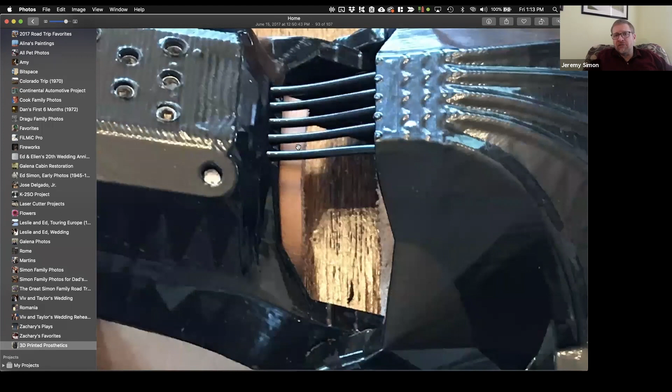You're probably familiar with the Phoenix hand, I'll come back to that in a moment. Here's the Osprey. Not a lot of people use it, but it's a very robust hand because it uses thick nylon monofilaments instead of two different types of cords. You don't have a non-flexible cord and a flexible cord to handle finger movement, you have one set of nylon monofilament which is push-pull. It causes the fingers to come in and go back out when you bend at the wrist. It also has leather components for the part that goes over the arm as well as over the palm, which is very durable and comfortable for the wearer. This was designed with sturdiness in mind, for an adult with heavy usage who needs something to stand up to a lot of wear and tear.

What you're looking at here is a print done in ABS and then treated with that acetone vapor treatment I mentioned before. That's why you're seeing that glossy, smooth surface. It was printed and then treated afterwards with that process. This is for that same gentleman I talked about before — he likes it that way, he goes for that black glossy look.

I don't know if I have recent photos of the Phoenix hand, so let me switch over. As you said, Ben, we could take a look at the hub for this.

Some of the print times are very different across different hands. There are so many variables involved when someone asks how long this will take — it depends on the design, of course, but also on scale. The larger you're printing the design, the more time it takes. There's also a whole bunch of settings that impact time too. You can optimize for print speed and get it done quickly, or optimize for print quality and strength, which takes a lot longer. That's what I tend to do — I don't care how long it takes, I optimize for the best possible quality and strength and just let it go. If it takes all day or two days, that's fine with me.

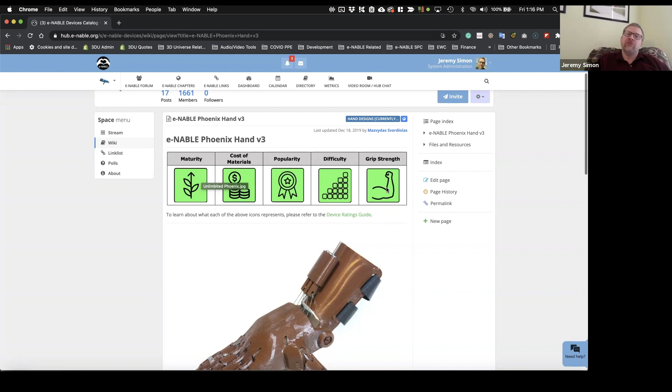So we try to share that with you in a sort of a low, medium, high factor. Then we give you a design, sort of a picture of what the design looks like. We give you a description, who the designers were, what the design is all about. And then we give you all the links you need to the STL files.

In some cases, we share the source CAD files. When we have access to them, we share them. Sometimes a designer might not share them. That's up to the individual designer, but we make them available when we have them. Links to any instructions or printable materials, links to assembly materials kits if those are available for this design,

links to video tutorials, links to a color customizer tool that one of our volunteers built that lets you preview this design in 3D in real time and apply different color schemes to it and sort of get it to look the way you want before printing. Very cool. So I wonder if you could pop that open actually for a second while you're talking about it.

Sure, sure. This device customizer, it's a great way of playing with and exploring and learning about the designs because you can kind of spin them around and look at them in 3D from all different angles and see what they look like. The color customizer also allows a user or a printer to see all the different parts, the different components that can be adjusted for color.

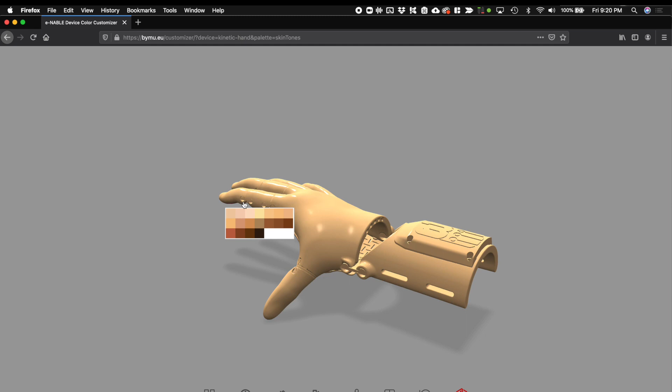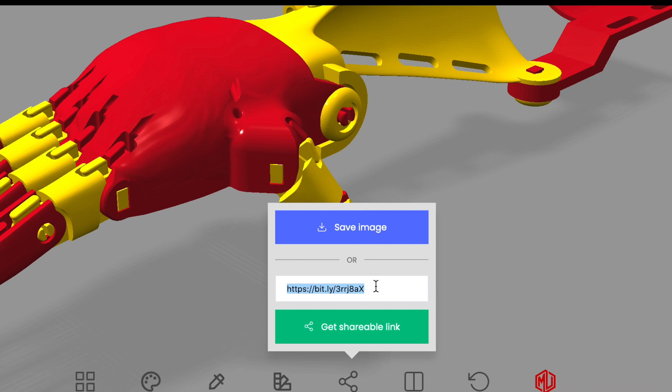So sometimes kids are looking for superhero designs, or really any user might want to have different colors to match different things that they're wearing. You can sort of play around with the joints versus the palm and all the different components. Yeah, it's a very cool tool. We'll include a link to this in the recording.

But as you can see, there's a very large catalog here, and it would be worthwhile just browsing through it. Take a look at each one of the designs, go play with them in the customizer tool that we were just trying to look at. Maybe look at the documentation on some of them.

In fact, I will call special attention to the Kinetic Hand, one of our newer designs, and just point out that this one in particular, if you want to see some beautiful documentation, it's included with the zip file that you download. But I'll pop it open for you real quick here, just to show you, because he did such a wonderful job on this. Oops. If there's any other questions while I'm pulling this up, please feel free to ask.

So yeah, I do have a quick question. So you mentioned the popularity indicator based on a number of prints that were made, but is it a good indication of the demand as well for that type of hand, or is it just what people print? Probably not, unfortunately, because we can't even say that we're basing it on how many are being made, because we don't know. The only thing we know is how many badges are being awarded. So that's all we have to base it on.

There might be a lot of people out there making it that aren't asking for badges. There also might be, like you said, the demand might not line up with that. It might be that there's a lot of demand, for example, for the Kinetic Hand because it's so attractive. A lot of our volunteers aren't making it because it's newer and they don't know about it yet. So no, I would not say it's a good reflection of demand per se. I would say it's more just an indication of how many of our volunteers are making it.

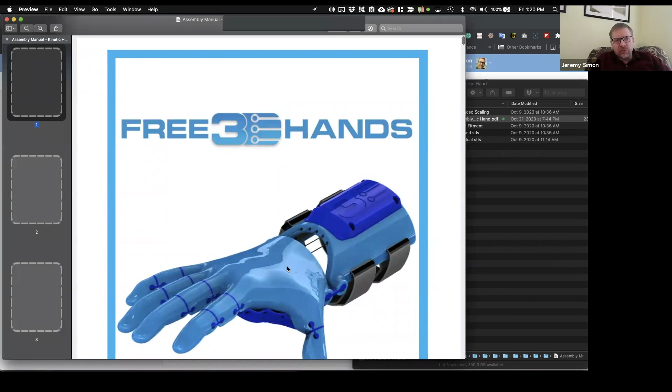So okay. If I here go into the Kinetic Hand, and this is what I downloaded already. This is one of our e-NABLE volunteers based in Australia, Matt Botel, and he just did a beautiful job on this documentation. It's so detailed. I'm gonna get to the interesting stuff and I'll slow down. Detailed diagrams throughout, explanations for all the different elements and concepts, parts lists, how everything goes together,

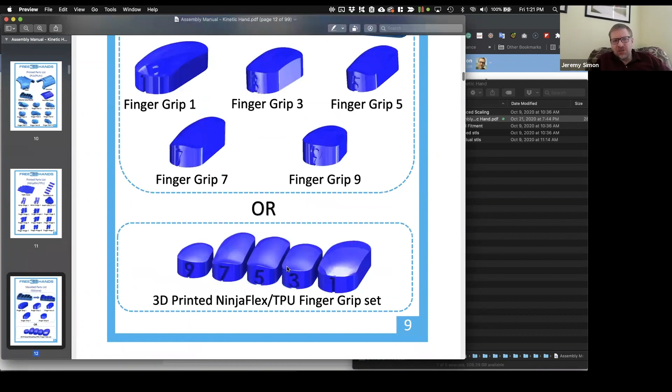silicone molding instructions. I've just never seen instructions like this. It's so thorough. I just wanted to give kudos to him and put this out there so that as we move forward, we can strive to make this level of documentation available to our community, because there's just some fantastic work that went into this.

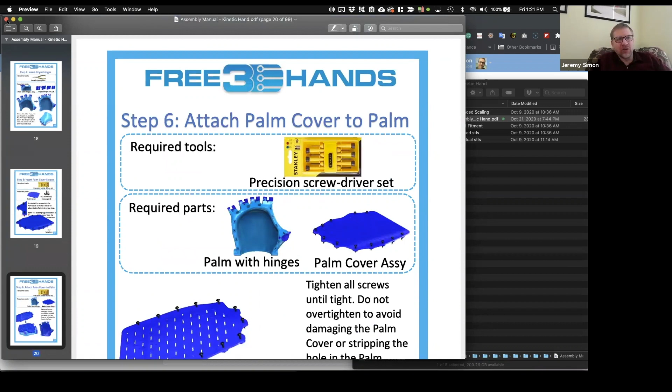Yeah, so getting back to my really level 0 question on how to avoid repeating the disaster with my first. What seemed to happen was not so much a kink, but it seemed like because this spool is brand new and it's so full, these coils were unwinding and just coming off. And I think they got wrapped up around the axle, no pun intended, and just stopped printing.

So I looked through the YouTubes to see if there's any simple fix, and I couldn't find anything. So I was thinking maybe just a little collar like this, so it just doesn't come off at the end, or is there anything cleverer? That certainly could help. That looks like a fine solution to me. I would think some kind of a filament guide arm would also be helpful. And my guess is that you could probably find something like that on Thingiverse, because you mentioned earlier that you have a FlashForge printer, is that right? Right.

So we can take a look and see. But what you want is something that you could 3D print and then mount on the back of your 3D printer, a little loop that your filament would feed through on its way to the feeder or extruder or whatever it uses. That would help keep it coming straight off of the spool and prevent it from going off to the sides like it did. So you would want to go in here and just search for FlashForge filament guide arm. I wonder if anything would come up for that. If not, we can get more general. It doesn't have to be FlashForge specific. It might be a more general part.

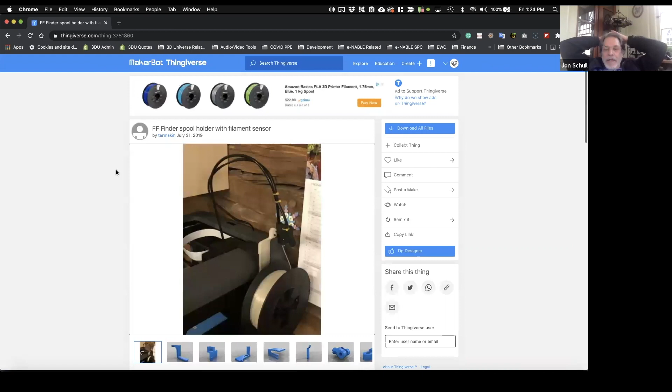Jon, while this is loading, what printers do you have at the lab in Rochester? We have Creality CR10S, and there's two. We also have one Ender that's living at Melvin's house right now. Okay. And what are some of the common problems with those? Because it does seem like in moving them, you had to readjust the settings and it took some time. Right. Recalibration is an issue. Sticking to the bed has been an issue. Now we're using painter's tape. Jeremy recommends Magic Goo. That's all I got to say.

But I've had adhesion be an issue. I also had filament breaking in the Bowden tube, which I think, Jeremy, check me on this, is just because it was old filament and had gotten dried out. Most likely, that's exactly right, especially with things that are more moisture sensitive, like if you're doing PVA or anything like that, it will dry out and get brittle and break. So if it's breaking in the Bowden tube, I would get fresh material. That's probably a humidity issue.

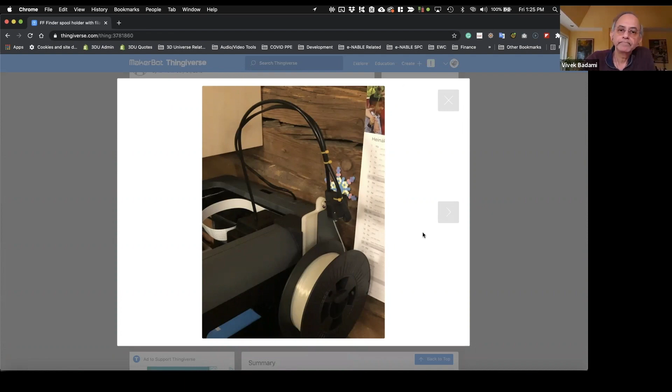And going back to Vivek, this is just an example here of one. Here's the type of thing where you could 3D print a new holder for the spool that feeds right into a guide there. There's a guide component that it feeds right up into, and that I think would prevent it from coming off the edges like it did. So you have a number of options to choose from. See what would work best. Thank you. And then Jon, give the Magic Goo a try, it'll change your printing experience. It's really amazing.